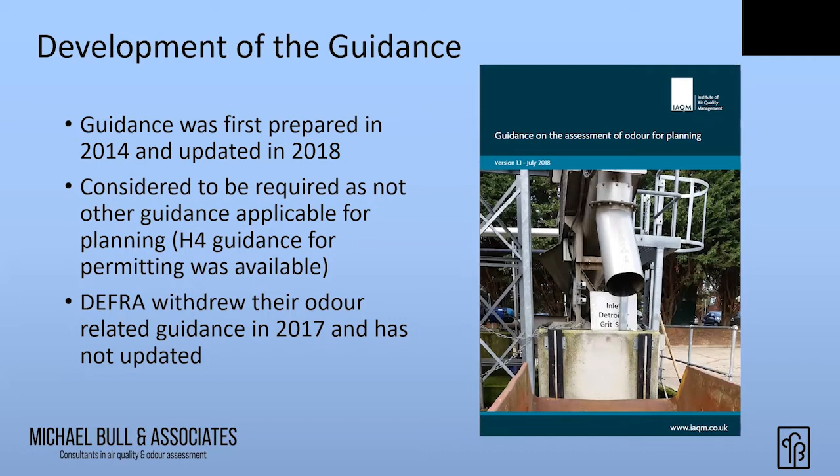At the time of the initial development, there was some guidance available from DEFRA, the local authority guidance for odours. There was commercial kitchen guidance, and a code of practice on wastewater treatment plants, but they withdrew all of that in 2017, and they don't seem to want to update it. So there's now even less guidance than when we started, so even more reason why we should have that guidance available.

There were other intentions as well as filling the gap for planning. We wanted as a professional body to help improve the quality of odour assessment, and in particular provide some consistency across the industry. There are very good reasons why consistency is important in odour assessment, particularly when we talk about standards, and you'll see that the way the standards are formulated means a consistent approach really would help.

When we started compiling the guidance, I think we thought we'd go in some depth on odour standards and be quite robust in our recommendations, but once we started looking at that, we found it quite difficult to come down on any particular set of odour standards, though they are talked about quite a bit in the guidance. And finally, we wanted to provide air quality assessments with advice on best practice for the assessment process, which is common to all of our guidance.

So what will I be reflecting on? I'll be looking at standards, and talking in some depth about modelling, in particular the selection of emission data that goes into modelling. But I would really stress that the guidance is not all about modelling; it is very clear that modelling is just one tool. My view is that observational methods are really useful and an essential part of odour assessment where you're looking at existing processes.

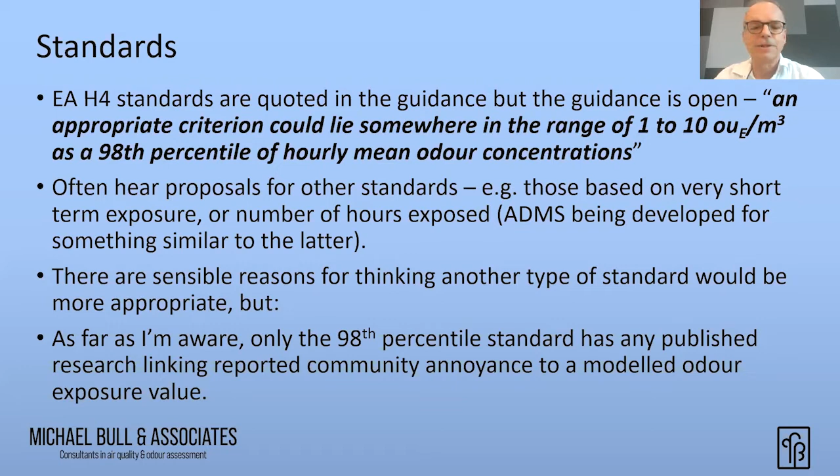Now, all of those have very sensible reasons for thinking why another standard would be more appropriate. The problem with any other standard, as far as I can see, is that it's only the 98th percentile standard that has any published research that really links community annoyance, so that's how annoying the public perceive the odour, with a modelled exposure value. It's all very well and good to come up with other proposals, but in the absence of that underlying research, it's very difficult to have any faith in another standard.

So there are 3 types of population exposed. One is people with an economic interest, which is labelled farmers within this. So they're obviously more tolerant, whereas there's so-called concentration and non-concentration areas, which relate to your expectation for the area. So a concentration area is one where there are plenty of, in this case, pig farms. And so you have an expectation you might come across pig farm odour in that area, whereas a non-concentration area is one where there is an absence of that activity. So the underlying research is not based on offensiveness, it's based on the nature of the population exposed.

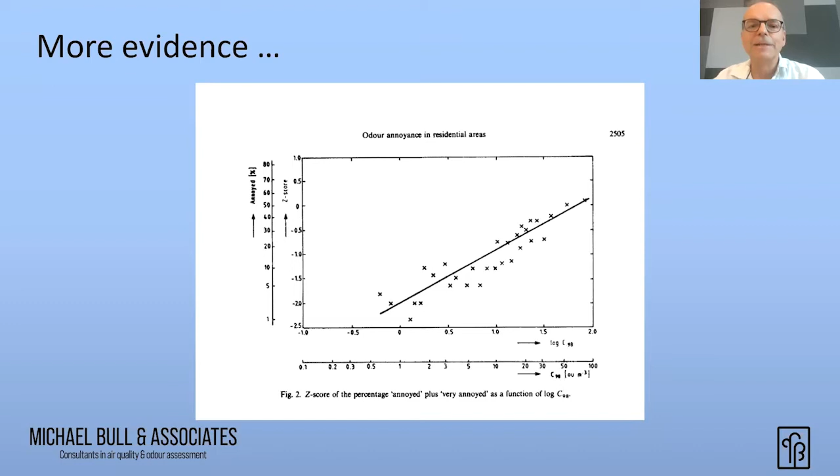But you'll see that there is some observed relationship there between exposure and annoyance. Questions have often been asked, why the 98th percentile? And I and several others have often thought that was because at the time these standards came forward, there was a 98th percentile NO2 standard. That was the statutory standard before our current air quality standards. And that seemed a sensible thing, that maybe people had set up their models to calculate 98th percentiles, and therefore

we can do this. But I did come across this justification for the standards in one of the well-known researchers of odour exposure, which I hoped would help. But actually, I think if you read that, it's quite difficult to understand exactly what they're getting at. I mean, it says 98th percentile uses a compromise between reliability and ability to discriminate, and higher percentiles are less

reliable. My interpretation of this is that they recognise that odour nuisance is caused by quite short-term high odour concentrations that may only occur rarely, but as a predictive parameter, that's quite a difficult thing to calculate, because the maximum will be reliant on very specific meteorological conditions that may only happen once or twice. So they're looking for a balance between a higher maximum level and something which discriminates on a local basis. That's my interpretation. I'll leave you to decide whether I've got that correct or not.

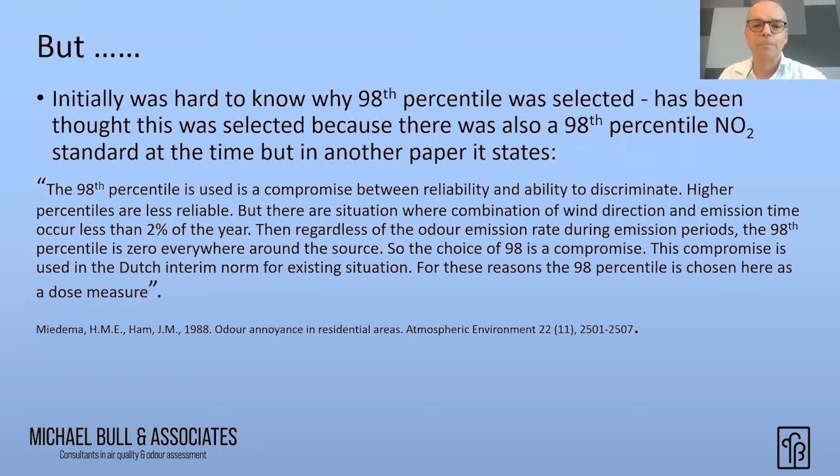So how robust are the standards? Bear in mind that I'm relating this back to the statement in the guidance that the standard might lie between 1 and 10. So there are some reasons why you can think that being vague about the exposure level is a reasonable thing to do. And that's because if we look at how the EA standards have been developed, firstly, they're based on the offensiveness of the odour, but we've already seen the underlying research isn't. It looks at 3 different types of population and for some reason puts that in terms of offensiveness of

the odour. There is an issue, quite of interest to philosophers of science, of external validity. And that is really, can you take the research that was used to support the standard, and does that really apply to the situation you're looking at now? So temporally and spatially, is research that examined the response to pig farm odours in the 1990s in Holland reasonably representative of, say, a UK population exposed to sewage odours in 2022? Now, we don't know that, but it's a reasonable argument to say that they're not necessarily equivalent, and so they may have a very different response to odours.

Finally, and I think this is really important when it comes to modelling, remember, this is an unusual standard. This is a standard that's based around measured annoyance in the community with a specific modelled value. So they've modelled the situation and compared that with surveyed annoyance. There's not a lot of information around about that modelling apart from the name of the model, and we could do with someone who was involved in the Dutch modelling at the time to really explain this a bit more.

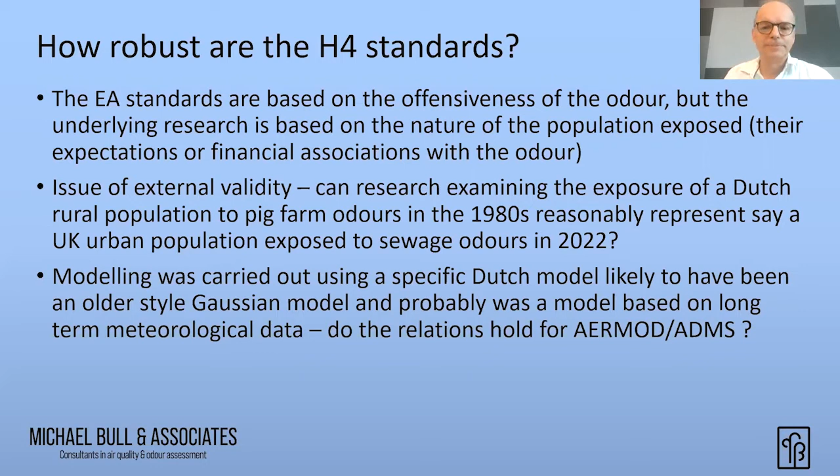So that's a summary of my views on that. If I look now at supporting references that are often used to support the standards, there are two I come across quite often.

One is the UK Water Industry Research study, the UKWIR study, which is a 2002 study which looked at complaints and, again, modelled odour exposure. And they came up with these conclusions: essentially, that the majority of the complaints were where there was exposure above 10 odour units as a 98th percentile, but there was a significant fraction between 5 and 10.

And I think you also have to bear in mind that at the time the water industry was really promoting a standard that was 5, and occasionally 10 in some cases. So there was some element of trying to justify these standards. Firstly, this was a study that was very well known and quite well respected, and it's all well and good. But there are two major things about this study.

One is that complaints are not the same as surveyed annoyance. Remember, the Environment Agency ones are based on community surveys, whereas complaint is effectively a self-reported survey. And it's a very different population that complains to those that are actively surveyed.

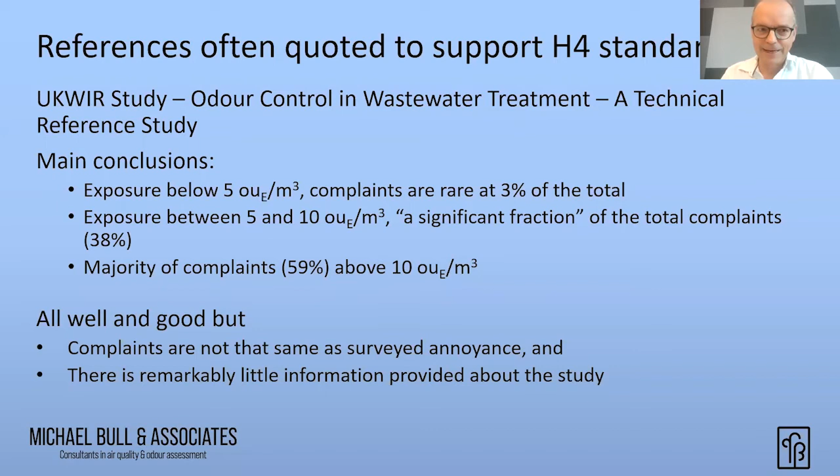The second thing, which really surprised me when I finally looked at this study, is just how little information there is about the study in the document. With the exception of that bit of text on the main conclusions, essentially this is it within the study. There is the reported number of complaints within different odour exposure levels at 9 completely unknown sewage treatment works somewhere.

We know nothing about the modelling. We know nothing about how the modelling was done. We don't know if this is library odour emission data. We don't know if it's surveyed odour emission data. Nothing at all, which is quite important. Particularly, we don't know what these sites are. We don't really know what our expectations are for those sites. So if there is no exposure nearby, for instance, then you wouldn't expect many complaints.

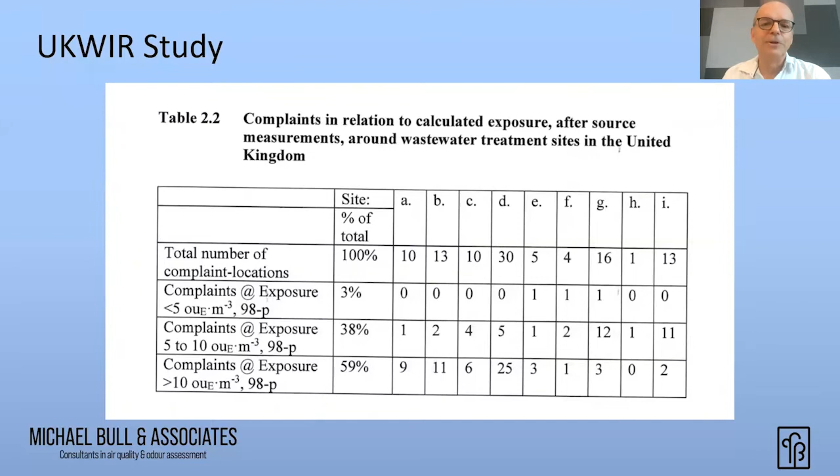The other thing to also note from the research is that actually there are not many complaints at any of these sites, which is a bit of a problem, I feel, because they're not giving you an awful lot of information. Now, myself and a colleague some years ago did our own version of this, which was published in Water and Environment Journal, and you can go away and have a look at this.

And we tried the same thing. This was modelling using ADMS, where we collated complaints information and modelled using library odour emission data to see whether we could see a relationship with odour exposure. And you'll see that we came up with a very different conclusion.

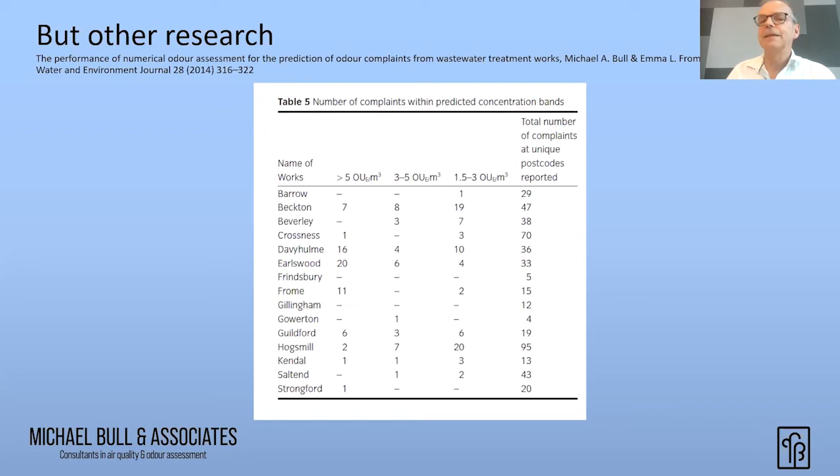But one of the interesting conclusions is that if you look on the right-hand side of that, in quite a lot of cases there were complaints well outside any of the exposure bands that we were testing. So people were complaining either because they were complaining about the wrong thing and weren't actually exposed, or quite likely in some cases they were complaining about one-off events that wouldn't have been picked up with the odour modelling. So in terms of the UKWIR study, I think you should consider the context of what's available within that in terms of supporting it.

CIWEM also produced a policy position paper. This was produced in 2012 by their air panel, and I was sitting on the air panel at the time they did that. Essentially, the CIWEM policy position paper rehashes the UKWIR research and talks about other experience.

And what it does, which is quite often done, including in the Environment Agency H4 justification, is talk about other studies done by the consultancy or the researcher, but they are very unspecific about those studies. They're not very transparent about where that information comes from. So I would say that the CIWEM position paper is really simply a regurgitation of UKWIR, and it's certainly not based on any new information. So they should be viewed as one and the same justification.

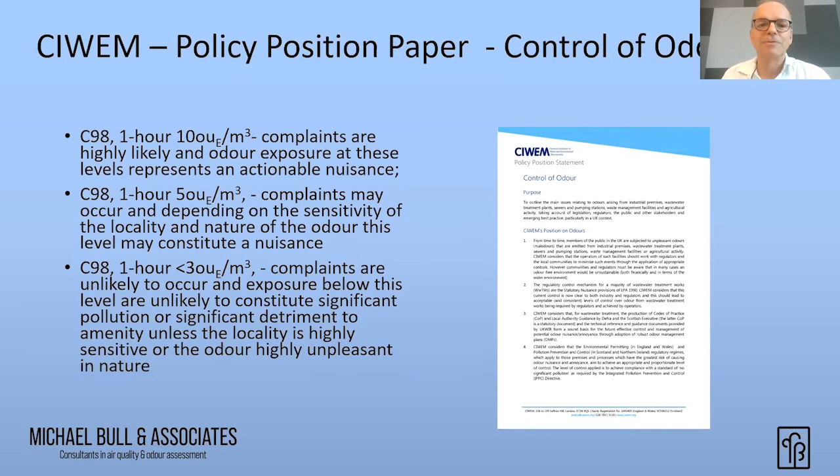I think in terms of modelling, the IAQM guidance has been useful in providing a much more consistent framework for modelling approaches. It's still, like any guidance document, if you give the same guidance document to a group of people, they'll interpret it in a way that they like. They'll make their own interpretation of that. And there are still some issues about that which result in potentially less consistency in modelling.

And I'm going to talk about the first of those mostly, which is the assessment of odour emission rates. But there are also other issues coming along, selection of model. You get differences in model predictions between ADMS and AERMOD. So which one do you use? And there is also a lot of interest in calms processing and met data selection for odour modelling, because those are quite important in terms of 98th percentile calculations.

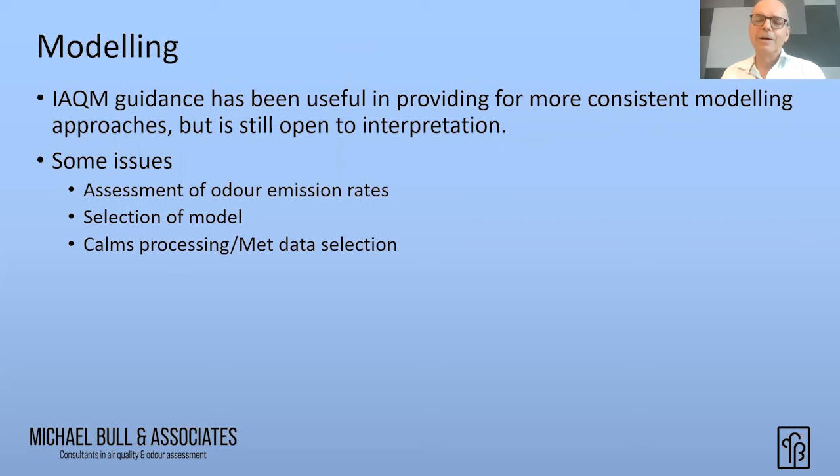I'm not going to talk about those at all, because my understanding is there's quite a bit of research going on anyway, particularly in terms of met data selection for air quality modelling generally. And I think that's going to be coming out soon, which will help inform us on that. But again, I'll keep coming back to why we're a bit vague in the guidance about the standards you apply. And I think that is because you can't really think of modelling as necessarily that precise an activity.

And this relates particularly to odour emission rates, which for odour assessment we usually take from surveys or library sources. And if you surveyed, you're probably using a combination of surveys and library sources, because you would concentrate the survey on the most important sources. So there are various places where you can get library odour emission rates from. There are several published studies. A lot of companies compile their own databases, and indeed, if you look on my website, there's a publicly available compilation of odour emission rates from other studies.

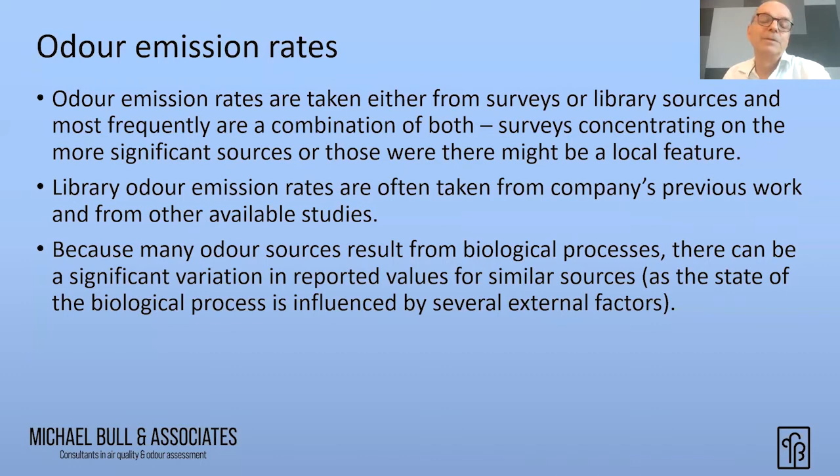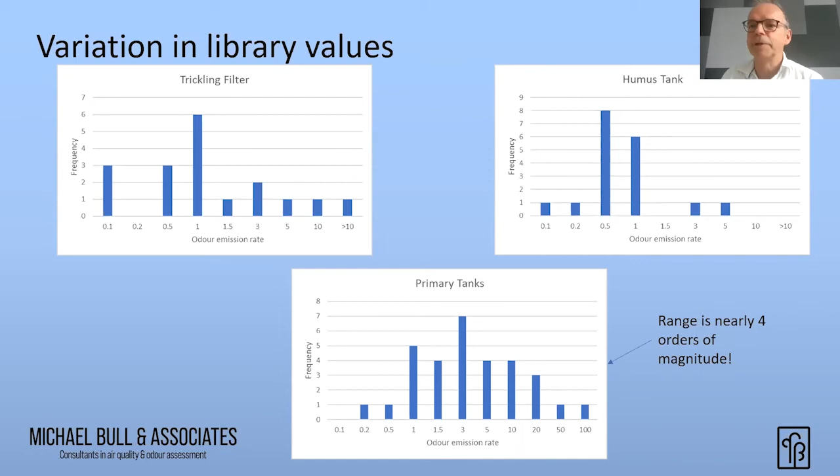So I've been saying, well, we know there's variation, so I'm going to take that into account. I will select a 70th percentile value for odour emission rate and use that. Then I can be confident that probably most of the time I'm going to be right. It is interesting, because I was doing one recently, I'd set the spreadsheet up to let me do this easily, I did just see what the effects of various different percentile selections were.

So starting with a median and going up to the 100th percentile, you see a very big range there. I would take the 100th percentile with a pinch of salt. Well, not necessarily a pinch of salt, they're real numbers, but the 100th percentile will relate to some very specific conditions, probably where there's been a process upset or some very dramatic poor management of the plant.

What is interesting, I think, and again gives me more confidence in my selection of around 70 to 80%, is there is a relationship observed between the capacity of the works and population equivalent and overall odour emission rates. And this particular works, which isn't the one in the picture, by the way, has a population equivalent of around 30,000. So the relationship says that you would probably expect the overall odour emission rate to be between 0.5 and 1 times the population equivalent.

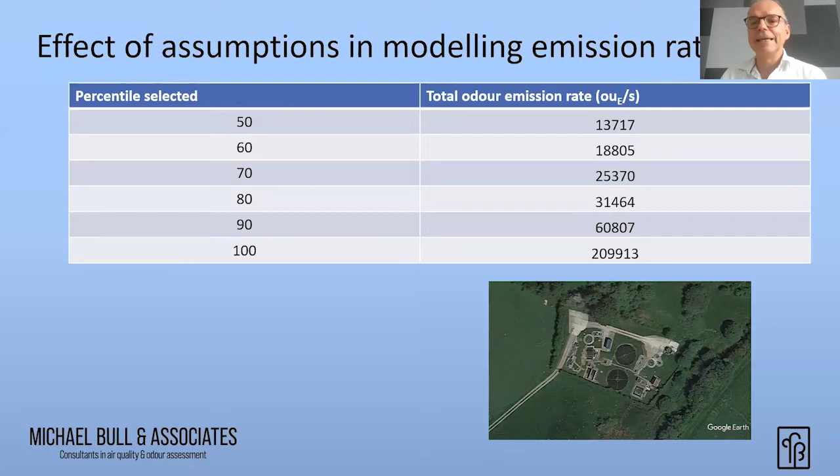So I think we can be reasonably confident that a value around 70 to 80% of the percentile is giving us a decent projection of what we would expect for an overall emission rate. But it is clear that the base choice of odour emission rate is significant. And I know a number of you might leap into the air and say, well, these are library rates, so if you go out and survey, it's going to be much easier.

Well, I've got one site where we did 2 surveys. Again, not this site in the picture, and you'll see that between 2 surveys there was a dramatic difference in emissions from particularly the inlet works, which was because on one occasion the inlet works septicity control wasn't working at all well.

The interesting thing about the 2 surveys is that even though individually the odour emission rates were quite different from the process, overall, when you calculated them out, they were quite similar. They were within about 10% of each other, the total odour emission rate. So maybe there's some benefit there.

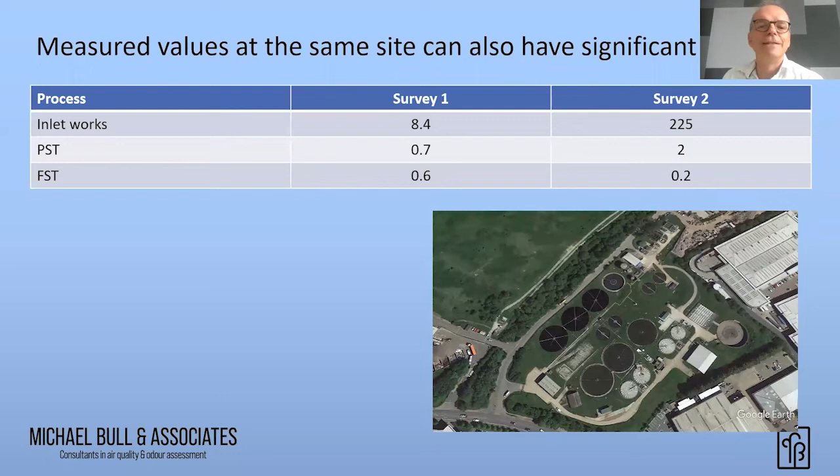So just in conclusion, on the odour emission rates, they're subject to some wide variation, and therefore some judgment is required in selection. But I think that judgment is much more important than any subsequent tinkering around with overall emission rates. People do tend to, particularly on sewage works, adjust them for turbulence. On various processes, they might adjust for seasonality or for diurnal variations, but the initial choice is going to be much more important than those little subsequent tinkerings.

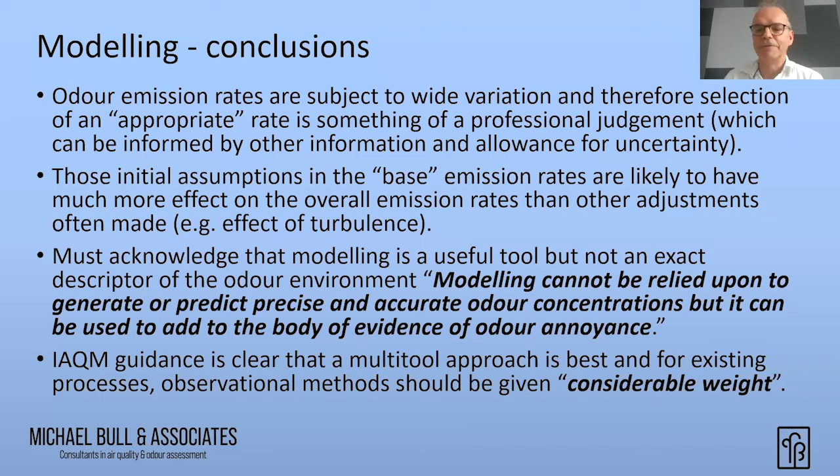And you do have to acknowledge within the guidance, we noted this then, that modelling's a tool. It's not necessarily very accurate and precise, but it adds to the body of evidence. And one of the things I really like about the guidance is it does say that for an existing process, the observational methods should be given considerable weight. And observational methods are these, which are complaints analysis, sniff testing, and community surveys.

I'd have to say I've never seen a community survey done within the UK, although one of my colleagues was asked if they could do one by a local authority recently. I don't think that's going to happen. And within limits, some of these are really useful tools.

I think complaints analysis, particularly if you're doing modelling, is very good. It certainly will confirm a problem. It's possibly less so to confirm the absence of a problem. But even so, if you look at complaints and you know that there is potentially a lot of exposure there and no complaints, you're building up evidence that perhaps there isn't a problem.

But sniff testing is, I've got to use this joke, not something to be sniffed at. Sniff testing is really quite useful, I think, possibly suffers from a bit of an image problem, but is a much more practical tool for odour assessment of existing processes. If you've got your process there, you might as well go out and see what it smells like, because that's what the community is experiencing as well. And unless you do that, just using modelling, you could open yourself up to some criticism and look like an idiot if your sniff test shows that it smells when your modelling suggests it doesn't.

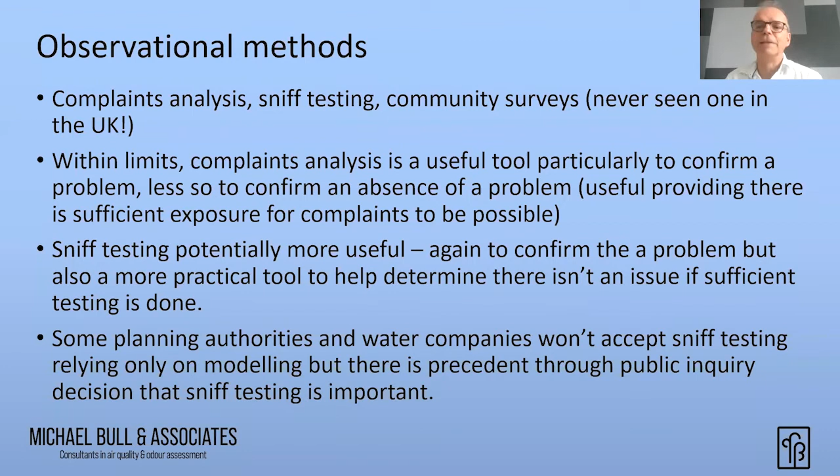It disappoints me that some planning authorities and water companies won't accept sniff testing very much. But there is precedent in public inquiry. This is one here in Farnham, and here the inspector accepted, even though the water company was pushing very hard for odour modelling, that this person had been out and done loads of sniff testing and couldn't smell it. So that seems pretty good evidence to me that it's not a problem.

And I would really commend to anyone looking to specify what should go into an odour assessment: don't just stop at modelling. These other observational tools are very useful in themselves.

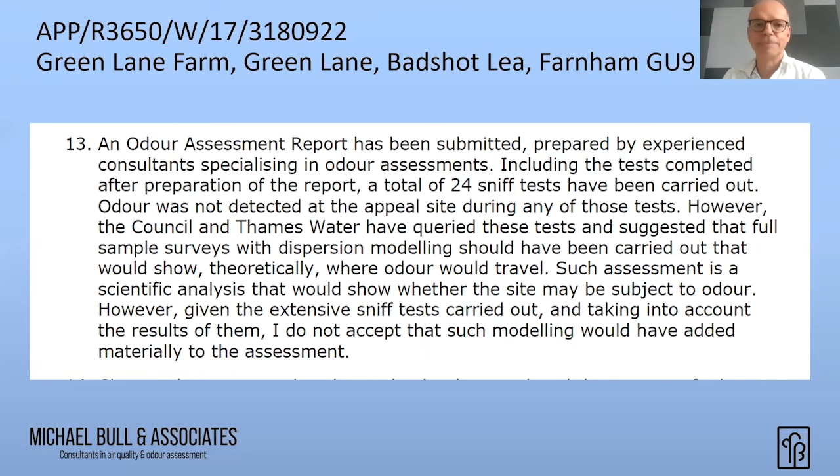One of the common features of all guidance that's being published is this talk about FIDOL factors. In the IAQM guidance, we talk about some qualitative assessment processes, and this is one of them. And FIDOL is talked about quite a bit. But one of the things I find quite interesting about all the guidance is none of it tells you how to use this to know whether you've got a problem or not.

It certainly specifies what these five factors mean, but it doesn't tell you how to tie those five factors together into a framework to tell you, yes, you've got a problem or not. And indeed, it says that you might get a problem from just a very short-term, single one-off high odor exposure, or you might get a problem from chronic low-level odor exposure. So it's quite difficult to know how to use this.

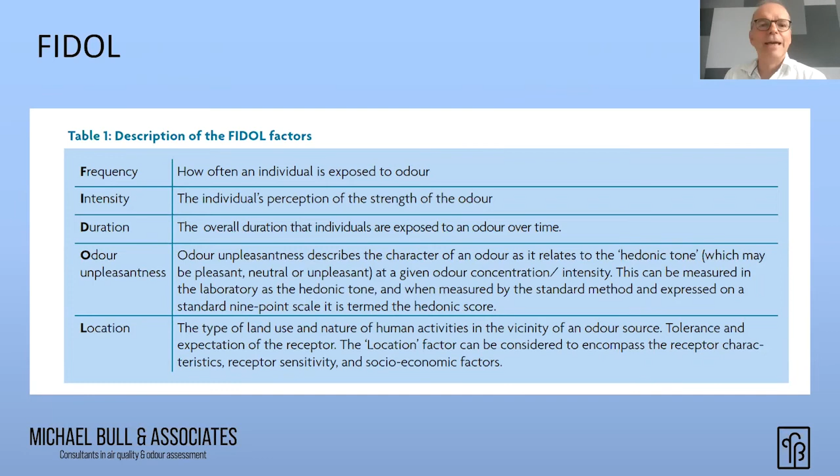So that's the description of the factors there. And all of those factors can, to an extent, be assessed in an objective manner, and there are some suggested descriptions. Some of this comes from guidance; particularly the SEPA guidance is quite good on this. And I had a public inquiry recently where we had a good argument over using these. You can see it's quite easy for a user to come along and put numbers or an assessment into each of these boxes. It's very difficult then, except if they're all bad, to come up with some outcome from that assessment.

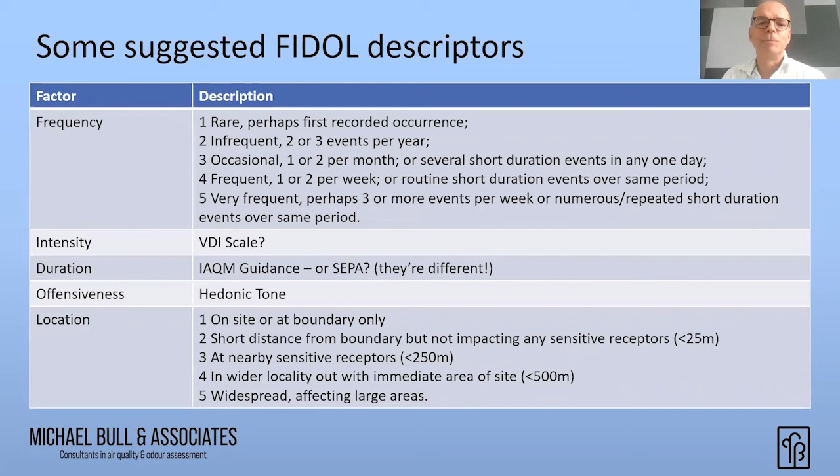I only just noticed this when I put this tool together, in terms of location. I think that this is from the SEPA guidance. It probably comes out with a very different idea from what you would do, which might just be looking at the individual sensitivity of a receptor. And as I say, the guidance points to the difficulties in using FIDO, and how the different exposures can give rise to different levels of nuisance.

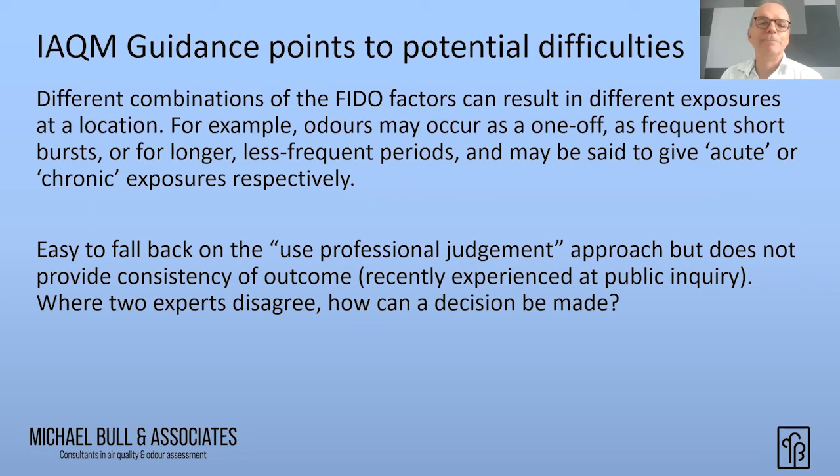And all of this guidance relies on professional judgment, and there isn't a lot of consistency of outcome, which I recently experienced at a public inquiry where I was one expert, and we were using both FIDO and source pathway receptor analysis, where we looked at a particular process. And this is the one area I'd highlight in the IAQM guidance that I think we need to look at, because within SPR assessment, there is this matrix framework.

And if you look at the matrix, in terms of source odor potential, you can really only get a problem from a large odor source, possibly with a medium one, but it would suggest that a small odor source is unlikely to give a problem. Now, I would suggest to you that's not the case. One of the principal reasons I say that is that one of the things I come across most frequently in terms of odor problems is something like a restaurant, which is quite clearly much smaller than a Part B process, might only be considered mildly odorous, might have some quite effective mitigation, but it does quite often give rise to odor problems. It is one of the most frequent sources that give rise to such nuisance.

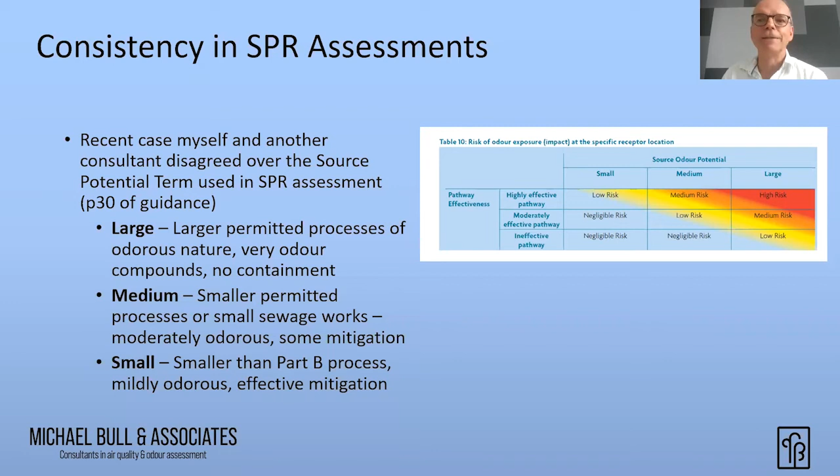And I think we really need to look at that SPR matrix to understand how it should be used in a better way. That's because I thought I was right at the public inquiry. Obviously, the other consultant had their own views as well.

So the one final issue that I'm going to quickly talk about is one I come across quite frequently and is difficult to resolve: the problem of combining sources. It is quite frequent in odor assessment that you have a continuous source with an occasional intermittent strong source superimposed on it. The two I would highlight: one is the sewage works, where you have your water treatment processes just generally purring along, a bit odorous, and then perhaps a sludge tanker will come along, or they'll do some process where they clear tanks, and you get a very high peak of odor.

Intensive animal rearing is another, where you get continuous emissions from the housing over a rearing cycle, and at the end of the cycle that stops. They then clear the house, and clearing the house of the accumulated litter is pretty odorous as well. So how do you do that?

Now, I do see people incorporating the occasional intermittent source into the modelling, but I think that doesn't work, because the 98th percentile metric misses those very high short-term odor peaks. And remember, those intermittent emissions may only be for a few hours each week, and the 98th percentile isn't really looking much at the top 170-odd hours. So if you put it into a model, you might only shift the 98th percentile metric a bit, but you'll miss those high odor peaks.